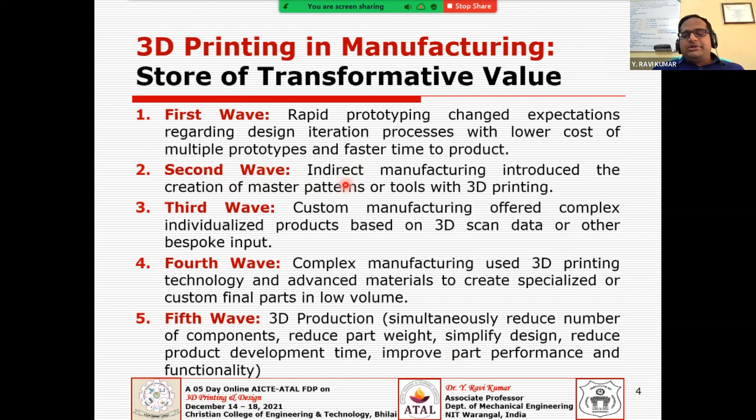So let us quickly see this 3D printing application, and where our tooling application will fit. My intention is to keep a couple of slides here to understand the importance of this tooling application in 3D printing. So we have the design applications.

Probably this is the initial level of application, but we cannot underestimate each and every application. As we understood from the previous slide, the first wave gave us the rapid prototyping application as the coined theme, the second was tooling, the third was customization, fourth was complexity, and fifth was 3D production.

So prototyping applications are also coming in, and it is not suppressed by the latest applications or developments, but you still have a lot of applications in the design space, like design related applications.

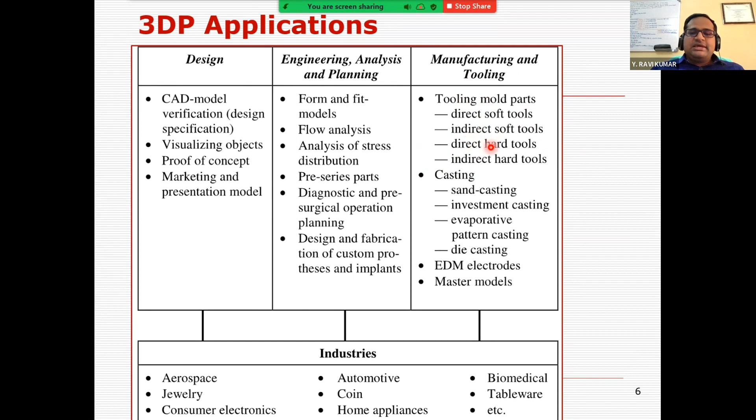Now let's see how these 3D printed parts have been used for which purposes - you can see the market share or percentage of usage of these parts. The majority goes to functional models. Functional model means it is almost a similar material that you are going to use for your final part.

Only then can you correlate your functional models with the original product, how it behaves. It should be the exact material, or it may have close properties or characteristics compared to the model versus your actual product.

So this figure will tell you the story of how this technology got matured in terms of preparing functional models, not prototype models. Though it started with prototyping applications, now the majority share goes to functional models, meaning the technology has matured enough to produce functional models.

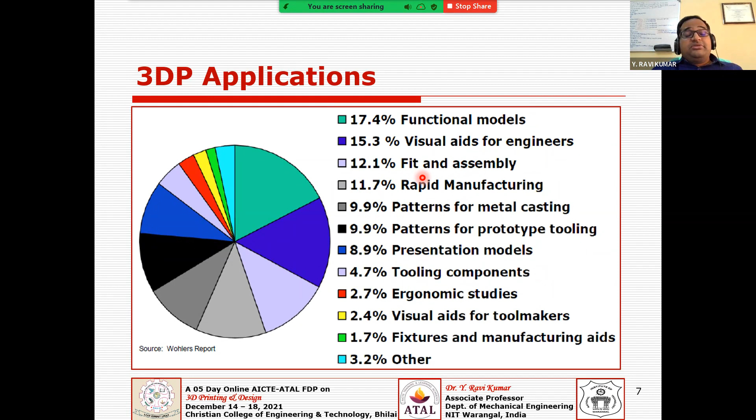So let us see what rapid tooling technology is. Let us see this rapid tooling - what is the necessity of going for rapid tooling? What is rapid tooling?

Rapid prototyping was the technique, as we know, and it was the first wave that we discussed in the previous slides. It has a limited range of materials, starting only with polymers. Majority of the time in the initial days, it was used only for visualization, dimensional checking, and geometric verification applications.

But now we have seen from the statistics that functional models are gaining a lot of attention, so functional testing of these prototypes is often not done before tooling. But due to the different properties of the prototype compared to production parts, the initial rapid prototyping technology was unable to support this functional testing.

This is because of the limited materials, which initially were polymers that could not take up high temperatures and other harsh environments. That's the root cause why people migrated to the rapid tooling methodology.

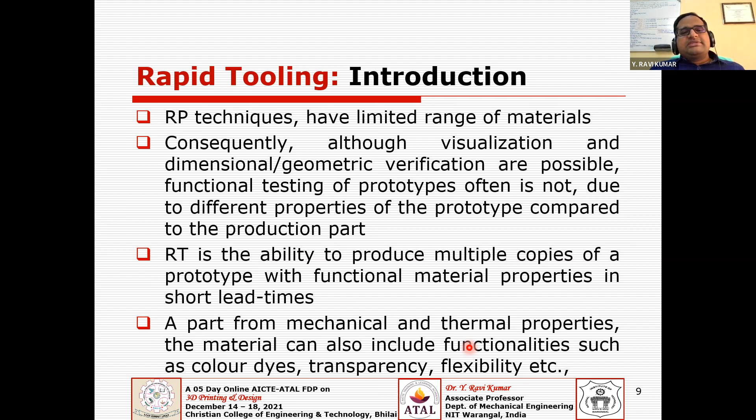Rapid tooling technology means using 3D printing in fabricating the tools. This is the background of where it has come from - the need for more materials, more functional materials, and improvement in mechanical and thermal properties.

This rapid tooling technique is a new technique derived from rapid prototyping, which was the first wave, followed by rapid tooling as the second wave. The need was for faster, better, and less expensive tooling solutions, which has resulted in developing many rapid tooling processes. As on date, around 45 tooling methods are commercialized or proven.

You can either use your rapid prototyping or 3D printed models as a pattern, from which you create molds from this master pattern - you can create molds as quickly as possible. It also uses rapid prototyping or 3D printing directly to fabricate the tools.

That's what we call making a pattern, an indirect way of doing it - it needs to go to the next step to make the mold. Otherwise, you can directly fabricate your tool, but this is for a limited volume of prototypes, not meant for millions or billions, but at least a reasonably good number.

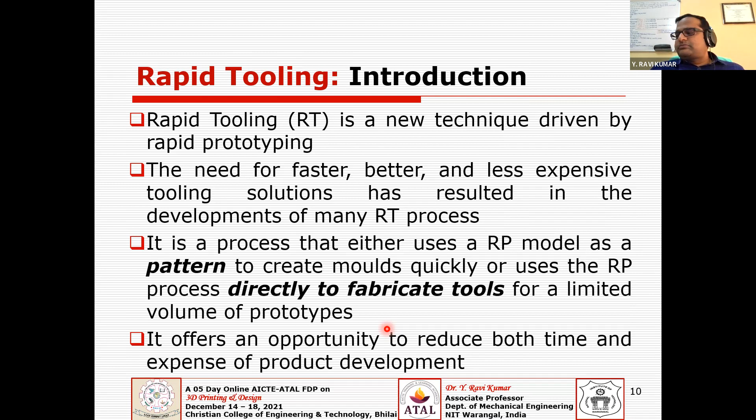Talking about rapid tooling advantages, you have a shorter tooling lead time, as we already discussed, the time scale now goes from months to a few days or a few weeks. So your time frame for development of the tool maybe days or a few weeks, but not months together. And you have low cost because of the short lead times. You also have functional testing of the parts at the early stages of design.

It also allows producing parts for functional testing at the early stages of the design, so you can even perform functional tests because of these tooling applications. And you can directly transfer your parts to the earlier design stage, which otherwise, if you don't have these models or prototypes, there could be misinterpretation through drawings - this can be avoided.

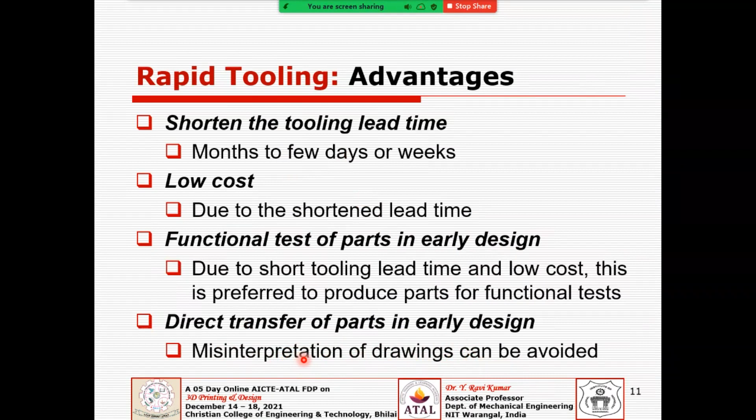Otherwise, if you have a flaw in your design, you come to know that during the production stage, or after service, or after sales. So during service you come to know that there is a flaw in the product or in your design. Then it will cost you a lot to recall those models, the products that people have already used. This often happens, right?

Even big companies, like automobile companies or even the cell phone industry, sometimes during a batch of production there is a problem. They will recall the products and do free servicing or replacement. This may happen quite often, and it may penalize not only the profits but also the reputation of your company. But anyway, these kinds of technologies enable you to avoid committing those mistakes, or give you the right path to run your business.

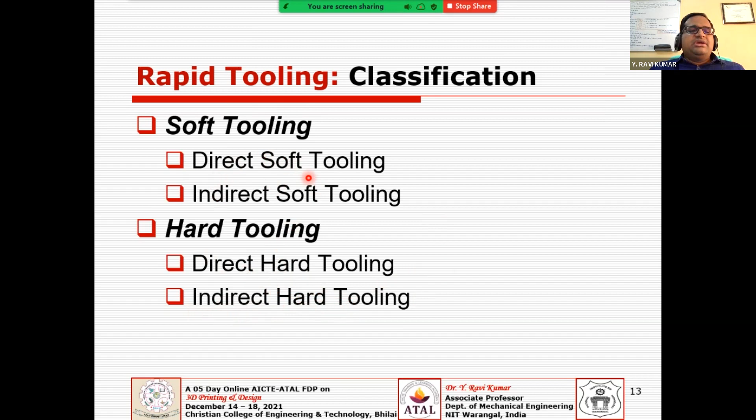Whereas if your tool material is somewhat harder, something like tool steel or any harder material used to make the tool, then the tool life may be high - compared with soft tools, the tool life is high. So for hard tools, either you directly make the tool in a single step, or in a two-step or three-step process, you get your tool - that is the indirect hard tool method. We'll explore each and every class of this rapid tooling.

In continuation with the previous discussion, soft tools are made out of silicon rubber normally, or epoxy resins, or low melting point alloys, or even foundry sand. Foundry sand means that is meant for sand casting applications - you can destroy that mold with a single usage, right?

So it means it will tell you the story - your soft tool may be meant for a minimum of a single cast that you are going to use, or it may be a small batch. If it is made out of foundry sand, it may be destroyed after a single use, meaning it's a single cast. Or it has been made with silicon rubber, epoxy resins, or low melting point alloys, so it may hold for a few dozens, maybe 30, 40, or 50. So you can get out of this tool - that is the soft tooling technique.

Coming to the hard tooling technique, these are made from tool steel, which is harder than the previous material we discussed, and it may hold for longer production runs. So the life of the die, or the number of shots you can make use of this tool, is quite high. That is called a hard tool.

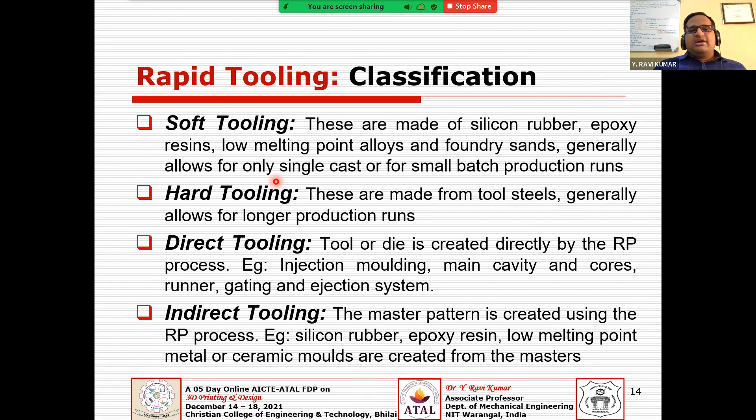So the master pattern has been created using 3D printed parts - you are using that as a master pattern. For example, you may make silicon rubber molds, epoxy resins, low melting point metals, or ceramic molds created from your masters. So you prepare a master, and further you prepare these molds with any one of these materials - you take an ABS plastic, make it as a master pattern, and produce a silicon rubber mold from it. Something like that. So we will discuss and explore all these four categories and various 3D printing processes, and how they have been integrated in these tooling applications.

With this classification, we will start with the first category - the direct soft tooling method. The name suggests direct method, meaning in a single step you are going to get the tool, but in a soft form, meaning it may hold or last for a limited number of uses. You may otherwise call it firm tooling, and you also have bridge tooling, but bridge tooling is a bit different. You may call it direct, soft, or otherwise firm tools.

The direct soft tools - the molding tool is produced directly. That's what we are talking about. An example would be sand castings - you make sand cores with this technology. Then you're going to get only a single cast, since you destroy the sand mold after pouring your molten liquid in, and that's basically a single cast you get.

Or you can go with composite molds, using a process like a vat system such as SLA, or even a powder bed system like SLS. So you can make a composite mold for your injection molding, production of plastic parts. You make use of this composite mold, and that will produce several shots of plastic parts through the injection molding process. In a single word, that's how you make your tool directly here.

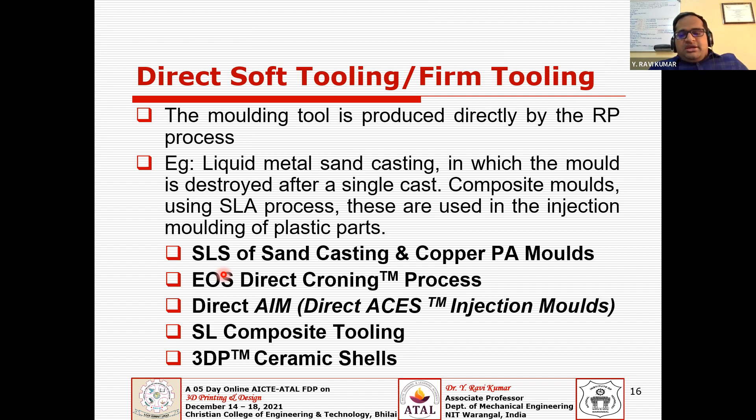Then we'll talk about SLS sand casting molds, or the SandForm. SandForm is a proprietary or trademark name for the material, basically sand zirconia or silicon-based sand particles. This is a powder bed system, where the material is in powder granules, either zirconia or silicon-based sand.

You design the entire die setup in your CAD model, and then it is printed through the sand molds and cores using a 3D printing powder bed system, like selective laser sintering. You ultimately get a single part, since this is only the sand core mold, which gets destroyed once it is cast.

It may take 1 to 3 days to complete the entire process: designing, fabrication, post-processing, the semi-finished casting, and then the finishing. So it will take 1 to 3 days.

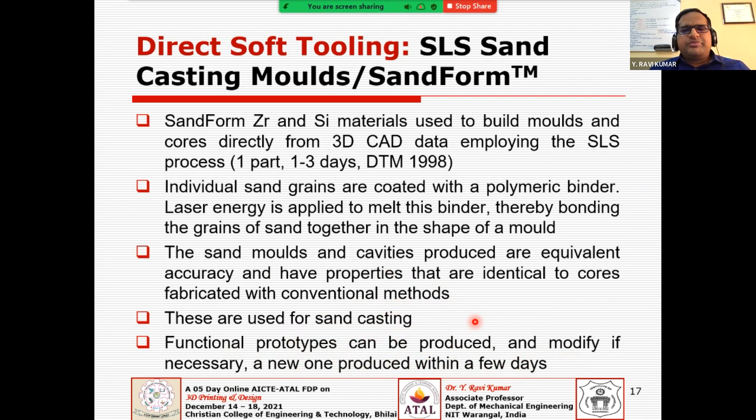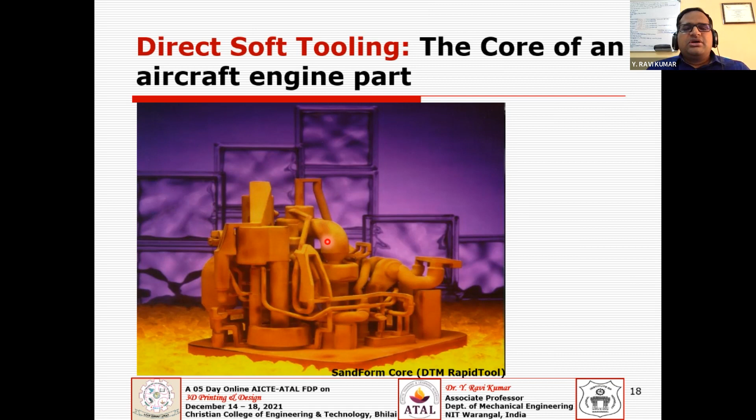Then it will be done in a matter of days, maybe 1, 2, or maximum 3 days. You could be able to complete this—even for something like an aircraft engine part, where you can make sand cores, and further it has been casted into metal, maybe aluminum kind of material.

You can also make use of a composite, like copper plus polyamide. Through this SLS tooling, that is direct soft tooling with composites of copper plus polyamide—a new metal-plastic composite designed for short run production applications, meant for a minimum of 20 and maximum of 150 parts.

So the tool development time will be done within a 1 week span, and no furnace cycle is required here. Your unfinished tool inserts can be produced in a single day. If you include designing and post-processing, everything will take one week, but you can directly produce your unfinished tool within 1 day.

During your CAD stage itself, you include all the cooling lines, your shelling design, ejector pins, guides, gates, and runners—everything in your CAD design itself. So in a single step from CAD to the tool. That's the idea of rapid tooling: CAD to tool in a single step.

So then you have these inserts. The surface is finished with sandpaper, because you definitely need a mirror kind of finish for these tools. You cannot get a mirror finish through 3D printing technology alone, so we need to do certain post-processing, super finishing methods to enhance the surface finish of the molds to a mirror finish.

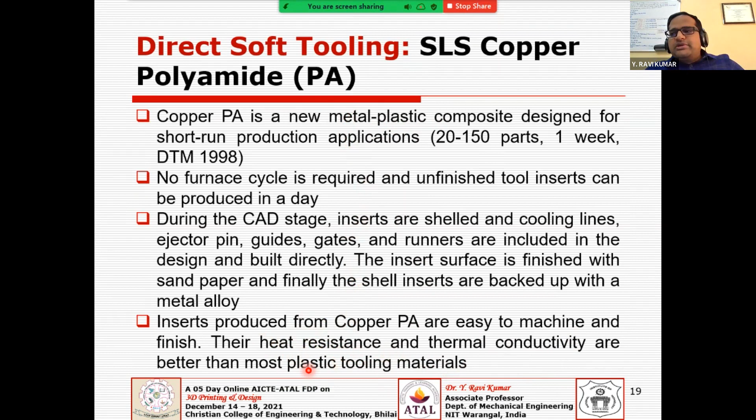So this is a composite of metal plus plastic, giving you the advantage of increased heat resistance and thermal conductivity compared to an ordinary plastic tooling material.

So you have the entire setup in your die design itself. In the CAD model itself, you include your cooling line, ejection pin guides, and this is the back surface of your insert. You can see the working surface, which has runner gates and everything included.

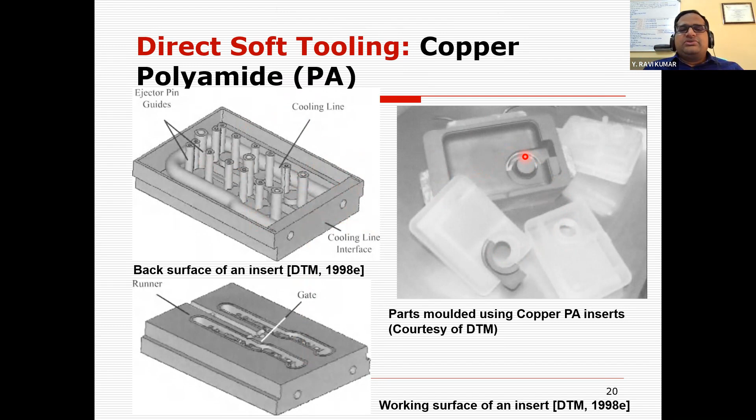So you can see these parts have been produced by making use of this insert. In this way, you can directly produce your entire die setup from CAD to the tool in a single step, and then integrate it with your injection molding, die casting, or whatever conventional method you use.

Then you have another technique here called direct croning. It's almost similar to the previous technology, but this is a German technology. There was actually a dispute between these two companies, but anyway now they've had a settlement or compromise. There's a slight difference in the process, but it almost looks the same.

You have sand particles, the powder, sand granulars taken the same as the previous one, and you have sand casting molds where the cores are directly sintered. Again, this is resin coated foundry sand, just with a different proprietary name, but it works on the same principle. Nothing is much different here—your molds and cores have been produced as a single part, because it is a sand core mold.

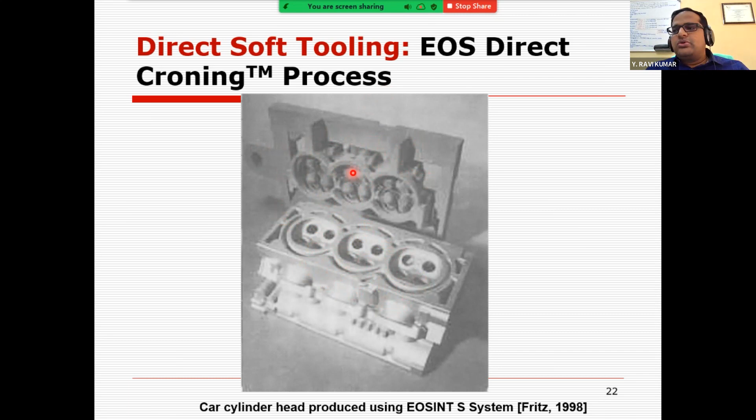So they have produced a 3-cylinder engine for the car, and this is what they have done through direct croning, or this sand core has been produced, and further it has been casted.

And you have this sand foundry sand. It has been used to build the material either in SLS and EOS. So both SLS, as I said, is a US based technology, and this is a German based technology, but it works with the same principle. There won't be much difference, as I already said.

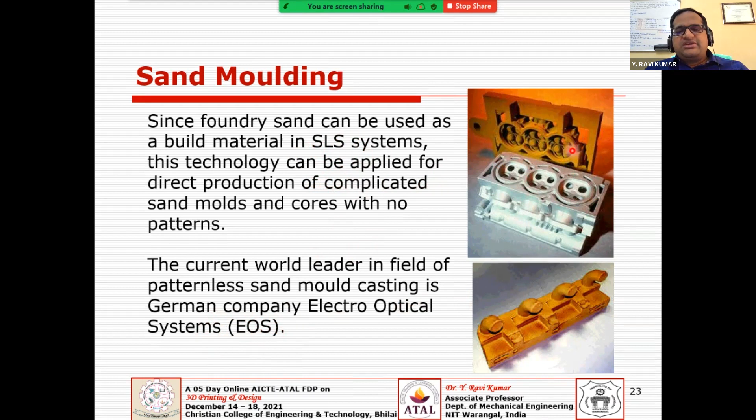So this is the sand cores, and then metal parts has been produced, and you can find other practical applications, maybe in the impeller, where you produce this sand core through a laser based system, just now we discussed, and then further it has been casted.

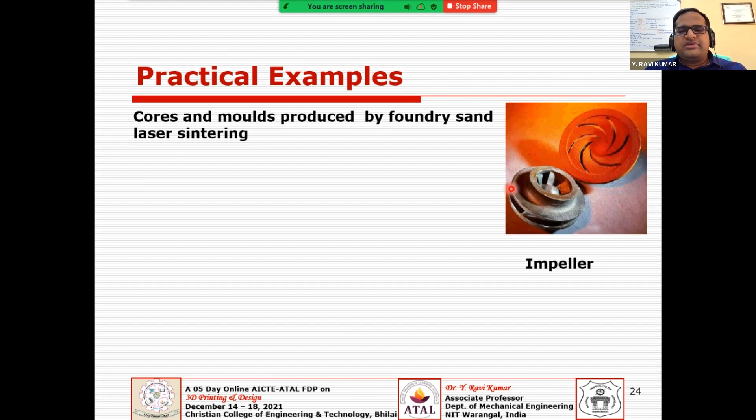And this is the hydraulic controller, the central block. The core, sand core, has been produced, and further it has been used for the casting.

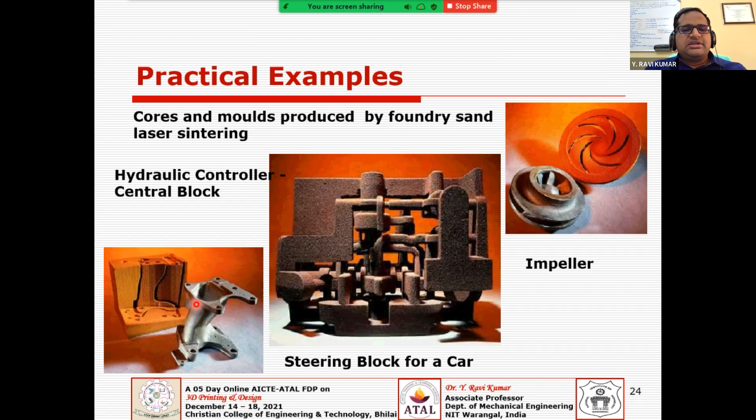Of the metal parts. And you have the steering block for a car. This is the core, the sand core, and this is the casting that has come out from this sand core, and the metal casting that has come out from this, one of the automobile applications. Either it may be an automobile application or any machinery applications like impellers or hydraulic controllers.

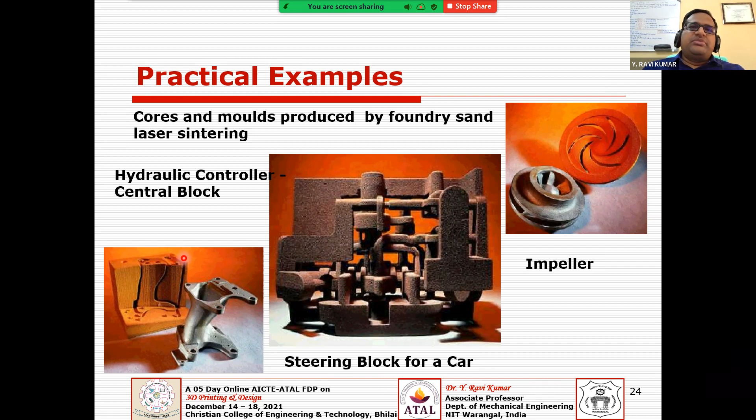So we can quickly produce this, right? It's a matter of days. Otherwise, traditionally, conventionally, it used to take months together to develop this sort of tools.

And this is again a sand core, and further it has been casted in aluminum, say A356-T6. So it's aluminum. It has come out from this sand core to the casting.

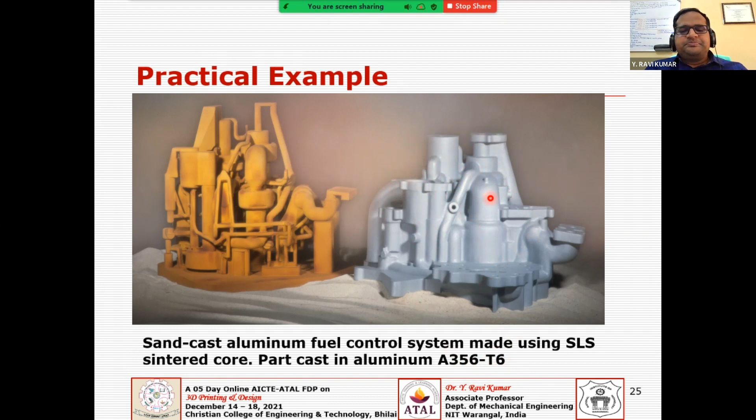And you have another technology called voxeljet. Voxeljet comes under a binder jetting system. I hope you are already aware of binder jetting technology in 3D printing. So far we are discussing a laser-based powder bed system, that is either your SLS or EOS, which basically comes under a powder bed system. But you have a binder jetting system, where you are going to jet the binder onto the powder particles.

So this voxeljet technology produces the sand cores and the mold packages. The technology used is different here, but the workflow remains the same. You start with a CAD model, that CAD setup, which consists of the entire die, a complete die setup or design, and then further it has been printed as a sand core, and it remains the same.

But you have very big size components here, like it may be 4 meter by 2 meter by 1 meter. So that is huge, a big sized component that can be produced here. So you have big dies, tools which you can directly produce. The materials typically used here are quartz sand or furan resin, with molds and casting properties which is compared with customized solutions.

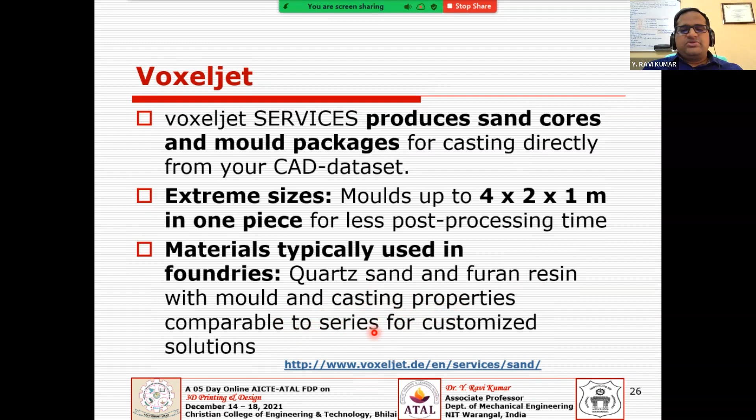And you have another company, ExOne. Voxeljet and ExOne, these are commercial companies, where MIT University has sold the patents to different companies in different regions, in US, in Europe. So another one is ExOne, which also works with the same binder jetting technology.

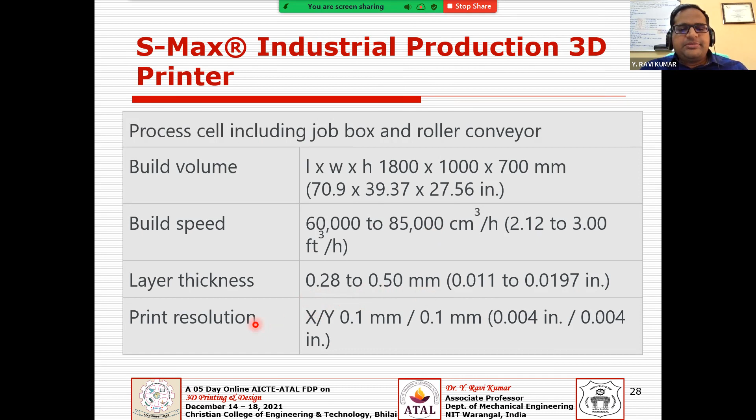So for your industrial materials, you have build volumes here also, say around 1800 by 1000 by 700, and build speeds around 60,000 to 85,000 centimeter cube per hour. So it's a huge speed. It's multi-jet jetting with the binders, and it is a bit faster. Even it can be further improved, because the speed should be improved further. But this is the typical speed you're going to get in the present scenario. The layer thickness may be around 0.28 to 0.5 mm, and the print resolution is 0.1 mm by 0.1 mm.

The process basically works with the binder jetting principle. And you have other technology called direct AIM.

Direct AIM has been developed from Dacell and Barritt, and this is meant for producing 20 to 100 parts, a minimum of 20 and maximum of 100. Primarily it has used the VAT-based SLA system, the stereolithography system. As we know, VAT-based systems produce a resin-based material, a photosensitive polymer resin, which allows directly producing injection molding parts, so thermoplastic injection molding.

These injection molding parts have a different build style, not like the models used in routine applications. They have dedicated toolpaths and support structures for injection molding applications. This technology was developed exclusively for injection molding, for preparing injection molds, and it produces a high level of accuracy. One of the biggest advantages of VAT-based systems is you get the best surface finish in polymers among all 3D printing technologies.

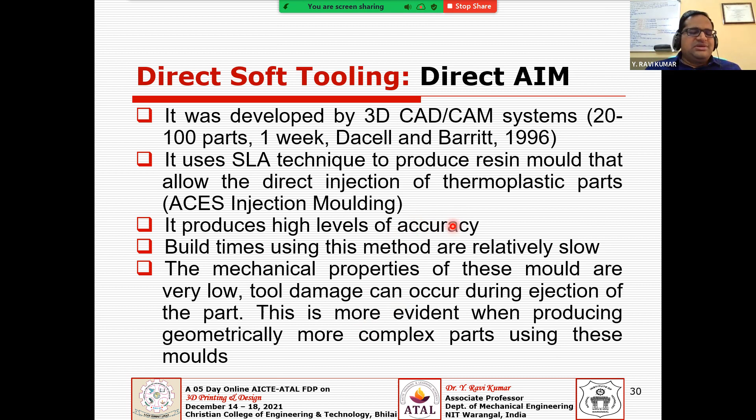And you have the direct AIM process. Again, it should start with the 3D mold design, and further it is done through your machine, the SLA-based machine. This is where you design everything - you have the cavity and core, everything designed in the CAD model, and it gets printed here.

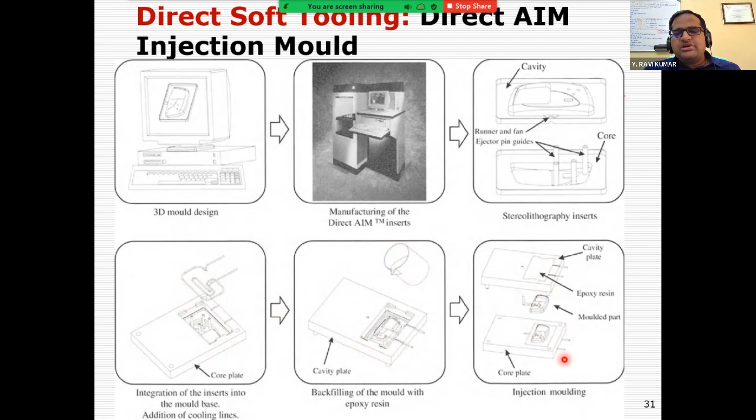As we already discussed, you are going to backfill - this is the backside of your mold where you add cooling lines, and you backfill the mold with epoxy resin. This is not the working surface of the mold, it's the backside. Finally you have the cavity and the core, and the part that comes out from this injection molding process.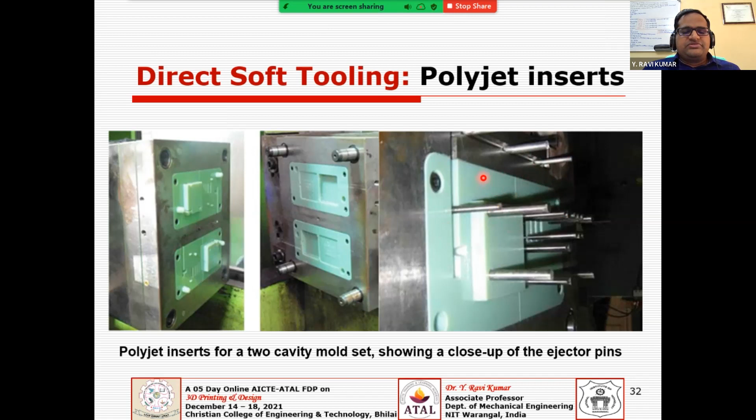You can also see other applications of injection molding, like mold setups which can be directly produced - for example, two-cavity mold sets produced through material jetting, the PolyJet technology. These base plates are printed through the PolyJet polymer technology, and then fixed into the ejector pins and the entire setup, so we can make use of this.

So far we have discussed direct soft tooling, but coming to indirect soft tooling means you're not getting the mold in a single step - you may get it in 2 or 3 steps, which we'll see. Indirect soft tooling is the method to produce a master pattern initially, and it is used to replicate your mold. You can use materials like rubber, epoxy, or low melting point metals - we will see one by one.

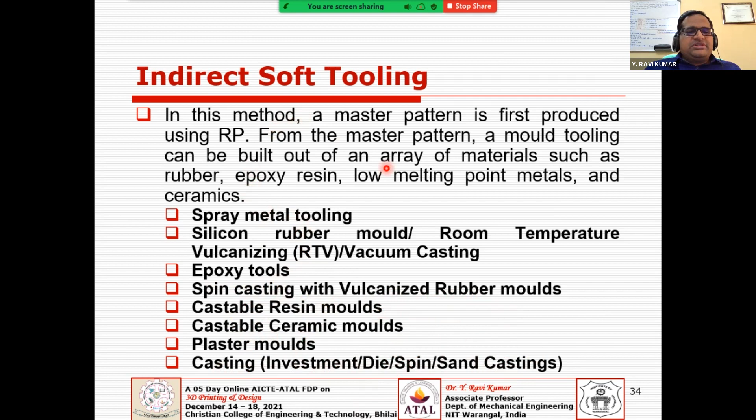There are several technologies, but I'll cover only the well-known indirect soft tooling methods. You have spray metal tooling and silicon rubber molds - this is very famous for automobile applications, used by several automobile companies integrated into their processes. You also have epoxy tools, spin casting with vulcanized rubber molds, castable resins, plaster molds, and of course investment casting, die casting, spin casting, and sand casting. We'll see these technologies one by one under indirect soft tooling.

As the name suggests, you are going to make the master pattern out of your 3D printing technology - that's why it's called an indirect method. Initially you produce this master pattern, and then in order to improve the working surface area, for the heat resistance and other characteristics you are looking for, you use a metal spray gun.

You have a metal spray shell that has been coated onto the top of the master pattern, and now you fill it with 85% aluminum filler. So you fill it, and this is half of the mold. You turn it on the other side and do it for the other part of the die.

So again you put the split pattern, the other half, and then you spray it with metal spray. Then you pour this resin, and finally you are left with your mold and that cavity. Then you can make use of this for your application.

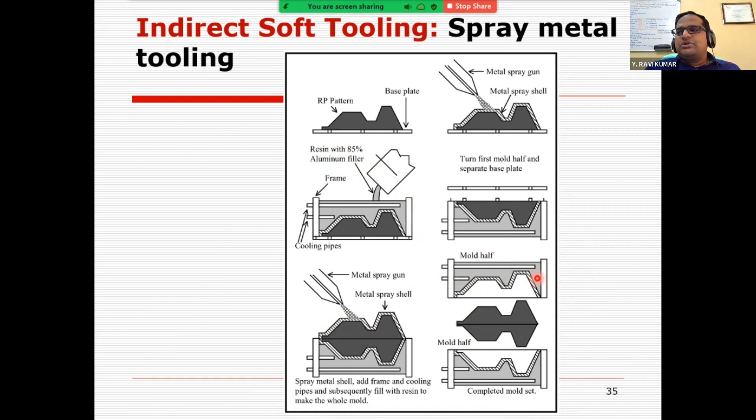So you produce the master pattern through 3D printing technology. You make this master pattern, and then you use a vacuum chamber here. Probably you may come across this vacuum casting technique. So you have the vacuum chamber inside, and you have the silicon slurry.

So you have the sprues and the mold box, and you pour it and allow it to solidify, this silicon rubber, the silicon slurry. Then you cut this rubber mold into two halves and remove the pattern, and now you have that mold, and now you mix your material.

Like you have resin A and resin B, and we can add some dyes also to get different colors. So now you stir it, and then you pour it into the mold and allow it for solidification, and now you cut the parting line, and now you have the final part come out.

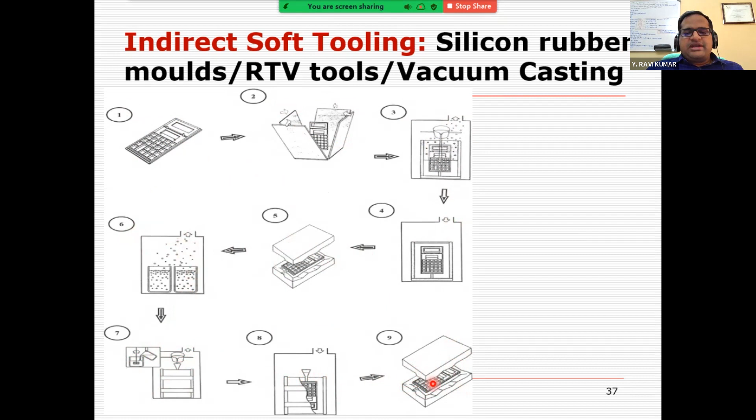And this may be the same, but shown in a different version. But anyway, you have the master pattern, put it in a box, and then you pour it. You make a rubber mold and cut it, and add it, and put it again. Finally, after solidification, you cut the parting line, and then you get your part.

So, with castings, you can go with metal molds. You have investment casting, die casting, spin casting, sand casting. These metal molds are very time consuming and more expensive to generate. So if you go to machining, conventional machining...

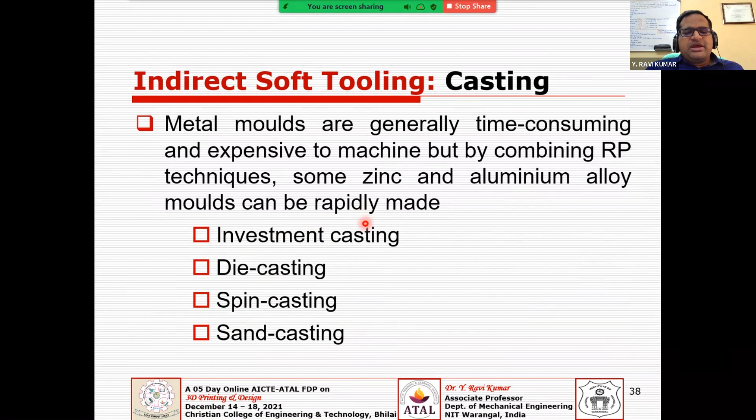But if you combine this with 3D printing, even some zinc aluminum alloy molds can be rapidly made through this technology. And this investment casting, as we know, we need to have a sacrificial model.

So nowadays the sacrificial materials, each and every 3D printing machine can accommodate either in terms of wax, foam, paper, or polycarbonate. This will act as a sacrificial pattern, so that you can directly produce any complex geometries through 3D printing or rapid prototyping, whatever you call it.

And you can use that for your investment casting applications. You use this as a sacrificial model and prepare the molds, and then you cast it.

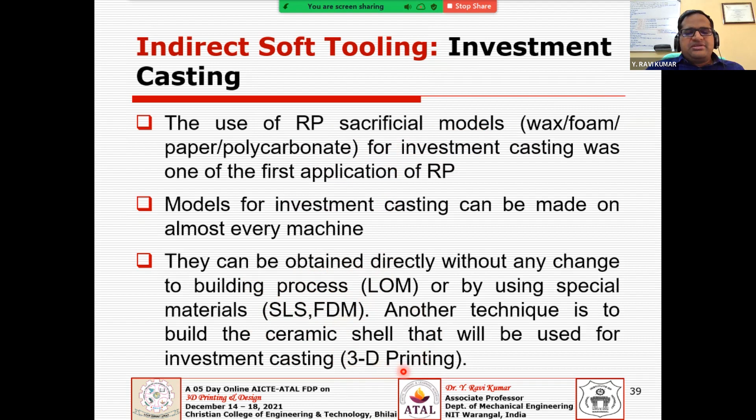So for investment casting, every machine will support this, maybe you can go with a sheet-based technology, powder-based technology, extrusion-based technology, or binder jetting technology. Almost all the processes will support it, so you can find any one of the sacrificial nature of the material that will support all these 3D printing processes.

As we know, in the investment casting process, only one thing has changed: you have made the wax patterns or sacrificial patterns through 3D printing, and the rest remains the same. You prepare a tree, apply the slurry, heat it, evacuate it, and then cast the molten metal into the cavity, allow it to solidify, break it, take out your part, and do finishing to get your metal part.

I'd say you can see this is one of the automobile applications - this is the cylinder head. So this is the pattern, the sacrificial pattern, which has been produced through additive manufacturing, and then further it has been cast. So this is the casting, which you can directly use for automobile applications, and it may be an aerospace application or automobile application to get things like a wiper motor casing.

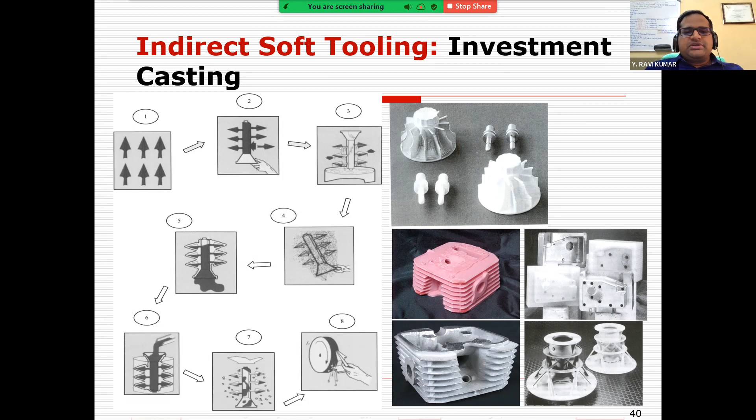You can even use some impellers, or metal screws, or implants for medical applications. So you can make these sacrificial kinds of patterns, and then cast them in the investment process. So you can generate objects through 3D printing, which is used indirectly in an investment casting process, where you can make a master pattern for creating the silicon rubber molds.

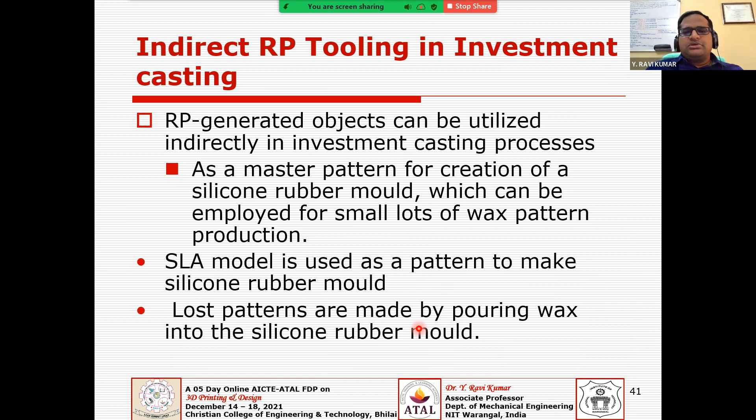This can even be employed for a small lot of wax patterns that can be produced with that. And you have SLA models, which can also be used to make the silicone rubber molds as a master pattern, or even lost patterns can be made to pour the wax into silicone rubber molds. Or you can even go with die casting applications.

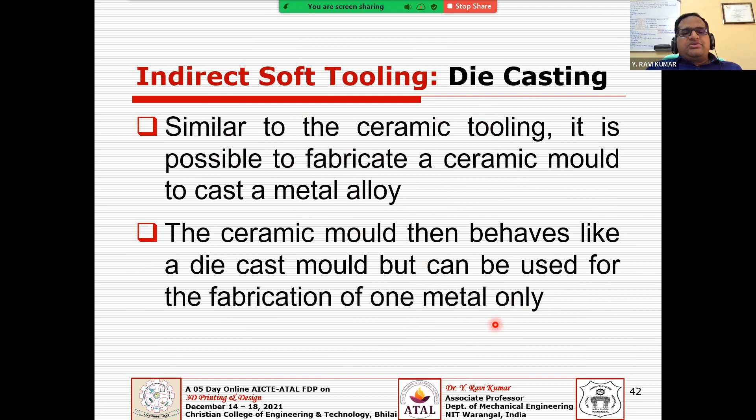In a similar way, ceramic tools can be made, and it is possible to fabricate ceramic molds to cast a metal alloy - that is your die casting application. So this can also be done through this process. Your ceramic molds behave like die cast molds, and will be used to fabricate only one metal - that's the thing.

Then you have the next class of tooling method, which is direct hard tooling. As the name suggests, you're going to get it directly, and it's going to be a hard tool, meaning the tool life may be high. Coming to direct hard tooling, in the previous indirect tooling methods, you needed to have...

...a minimum of one intermediate replication process, meaning from master pattern to mold - that is the minimum. It requires one intermediate step to complete your tool. But here you can directly get your tool in a single step.

But anyway, if you are going with multiple steps, definitely your error may accumulate. If there is an error in any one of these steps, going from the master pattern to replication of your mold to the casting, there will be a chance of losing your accuracy. But you have an opportunity here with the direct tooling method.

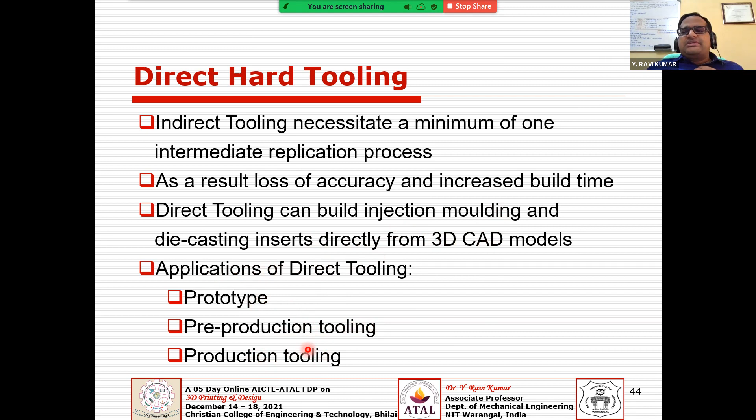So you can directly produce injection molding or die casting inserts - that is from CAD to the die insert for your application, like injection molding, die casting, or anything for that matter. So then you can use these for applications like prototyping, pre-production tooling, or even production tooling parts can be made through this.

Coming to direct hard tooling, this is a very interesting and recent development, and a lot of research is going on in these hard tooling methods. The biggest advantage of hard tooling is faster turnover times, and it creates highly complex shapes, molds, for high volume production - meaning you can use your tool for a good number of shots, giving you higher volume production than the previous technique.

So you have these inserts for pre-production or production tools, like EOS DirectTool or direct metal, DTM - again you have two German and US companies here working with almost similar technology - and sheet-based LOM tooling, and Pro Metal, which is again a binder jetting system, and laser engineered net shaping, which is a DED system. So altogether, to produce the hard direct tool, you need a high melting point metal, maybe hard tool steel or substitute materials somewhat close to that, and then you may use this direct hard tooling process.

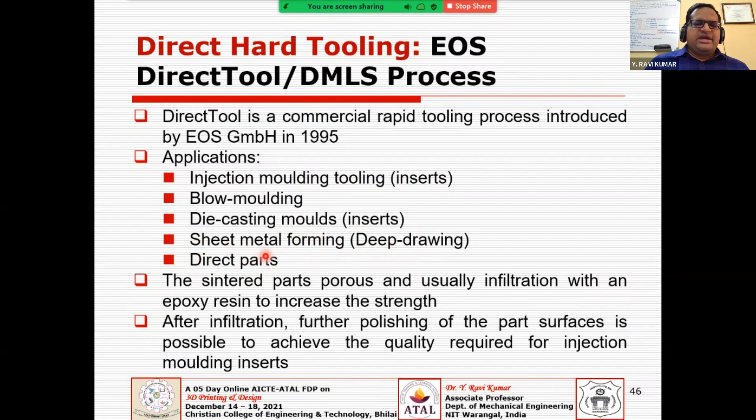Deep drawing dies can also be made directly, or even direct parts can also be done. They do have a certain material - the powder material may be direct steel 50, or direct metal 50, or direct metal 100. This means there is a slight composition difference, and the size of the powder particles designates 50 micron or 100 micron, with composition also slightly varied.

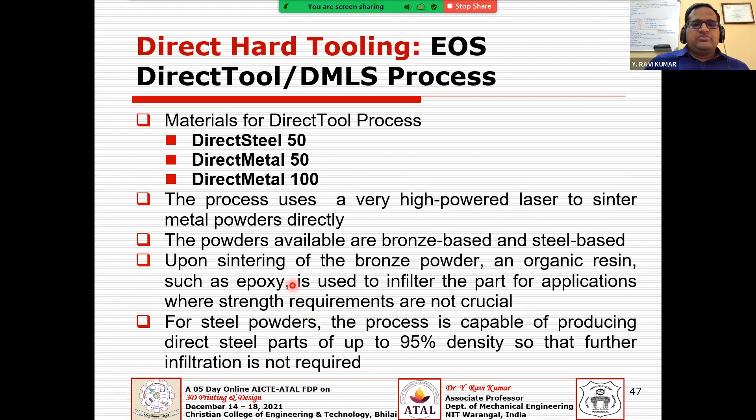So you have bronze based or steel based powders. With bronze based powders, which have been sintered, the binder has been coated with organic resin. Typically this produces a 90% dense part, and further it has been infiltrated to get 100% dense parts. So infiltration should be done here - this is one limitation, you have to go with infiltration. It is not required, sorry - infiltration is not required if you go with a steel powder, but whether you are going with steel or bronze, that matters.

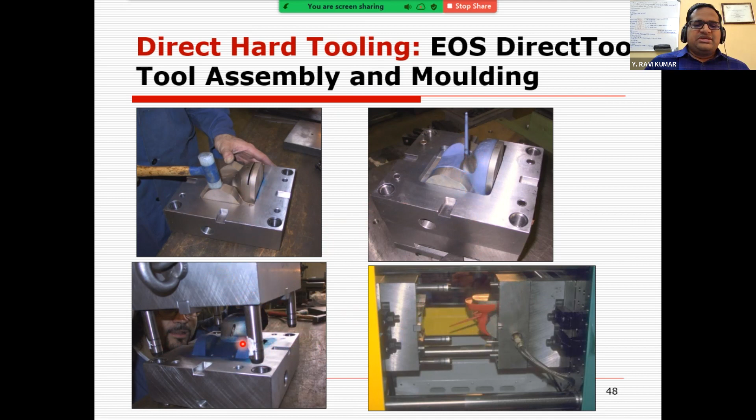So then you can directly produce this die tooling assembly, this entire thing. This is the base, and then these are the inserts that have been produced through this 3D printing technology. Now it has been assembled and integrated with the injection molding machine, where you get these plastic parts from this die. This entire tool assembly, with the base plate and the ejection pins, everything, has been done through additive manufacturing.

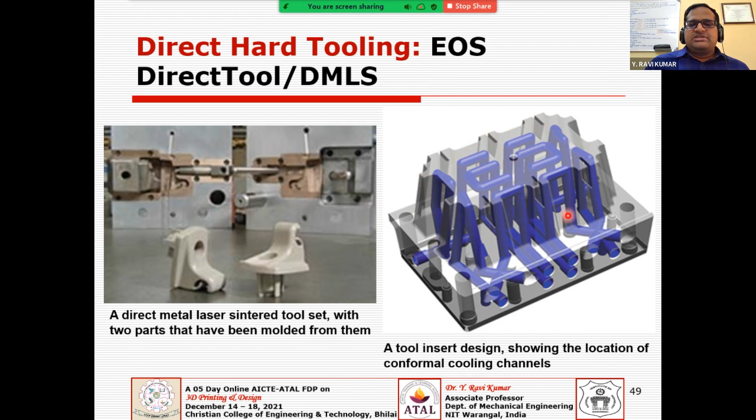This is from EOS DirectTool, and this is another die setup that has been produced, and from that die, these are the plastic parts that have come out, and even the conformal cooling channels. This is another advantage, an added advantage with the 3D printing technology, where you can confine your cooling channels to the shape of the object that you're producing.

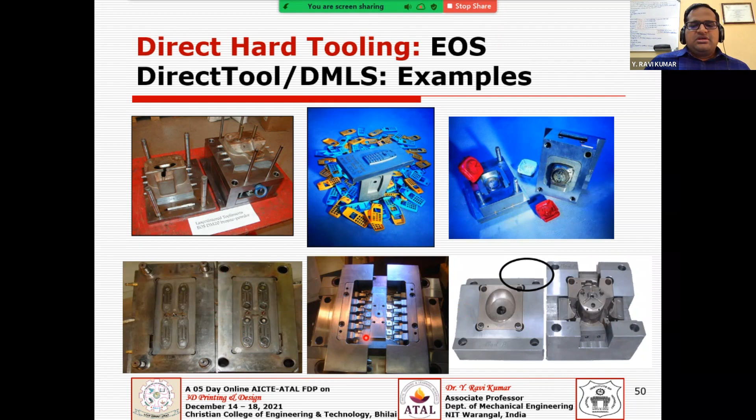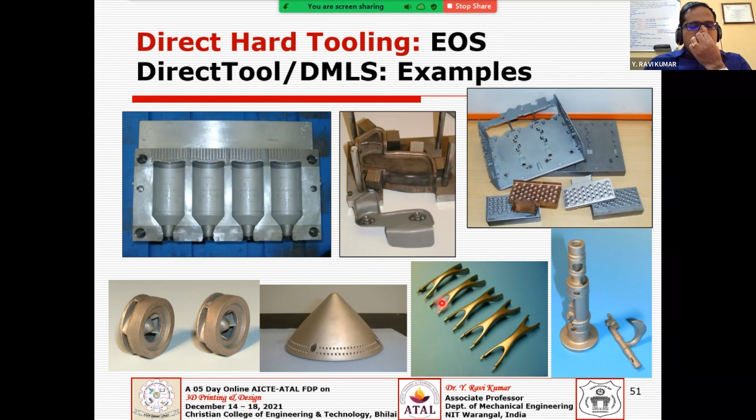And you have blow molding dies that can also be done through this, and some of the stamping dies. And you have direct parts, an impeller or some instruments - these are directly produced.

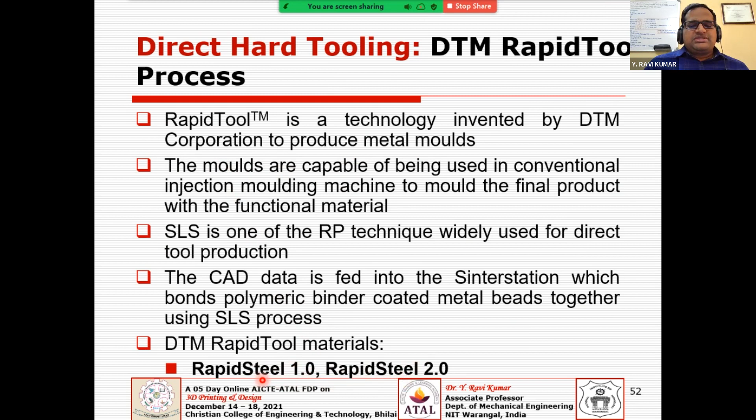And the rapid tool process - you have two different processes here: rapid steel 1 and rapid steel 2. There is a slight difference between 1 and 2, but basically you are going to get a green part initially, and here the mean size of the powder particle is 55 microns, and the green part has been initially produced.

Then you use a thermoset binder coating, which is put in a furnace for cross linking. Then finally you do furnace processing to fully densify your part to 100% dense by mixing it with copper, infiltrating it. So ultimately your tool is 60% steel and 40% copper, and it's fully dense. It has been finished with surface grinding and milling and drilling, EDM, polishing and surface plating. You come with a mirror finish by performing this post processing.

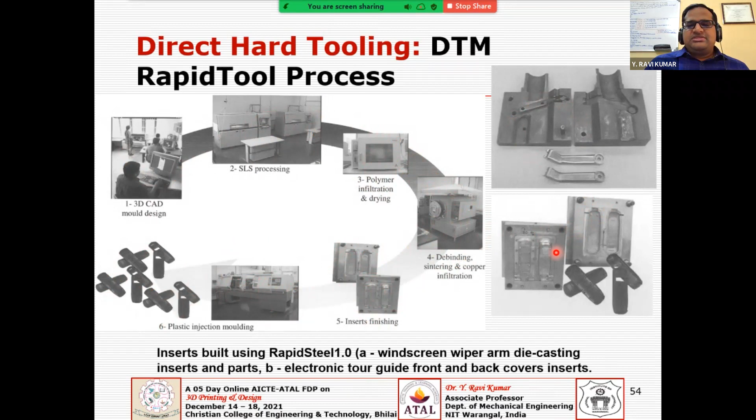So you have other dies and parts produced with rapid steel 1 and 2. There is a slight difference - you have different temperatures and different infiltrants you use here, but it has the green part, brown part, followed by infiltration for 2 hours at room temperature, and the temperature raised to 1050 degrees C. This is the furnace treatment that should be done.

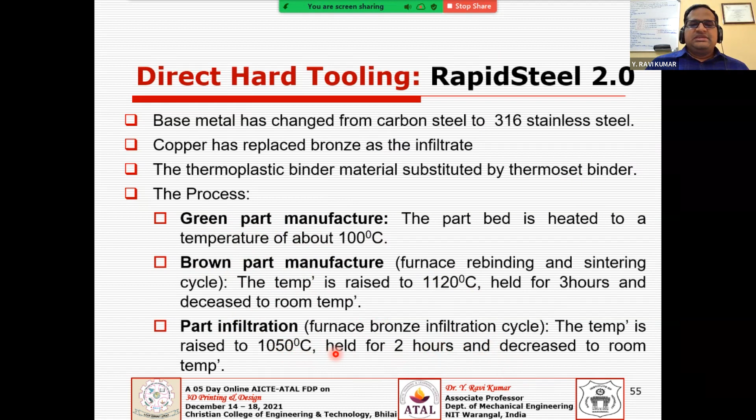And you have the LOM process - it is a sheet lamination based technology, where you have the binder coating, and the polymer sheets have been coated.

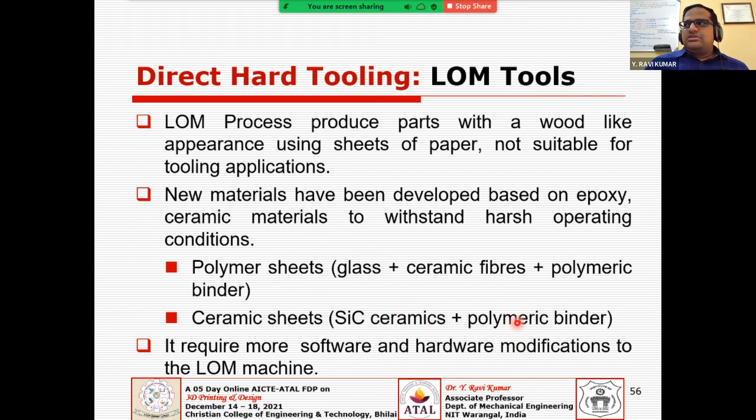You have the glass plus ceramic fibers plus polymeric binder coated onto these sheets, or either you use polymer sheets or ceramic sheets. You have silicon carbide ceramics plus the polymeric binder used as a material to prepare these tools.

And ProMetal is an Irwin technology that again has come from MIT. This is a binder jetting based technology, and it gives better properties to the tools, which can withstand up to 200 MPa, and can hold for about 1 lakh shots with glass filled nylon.

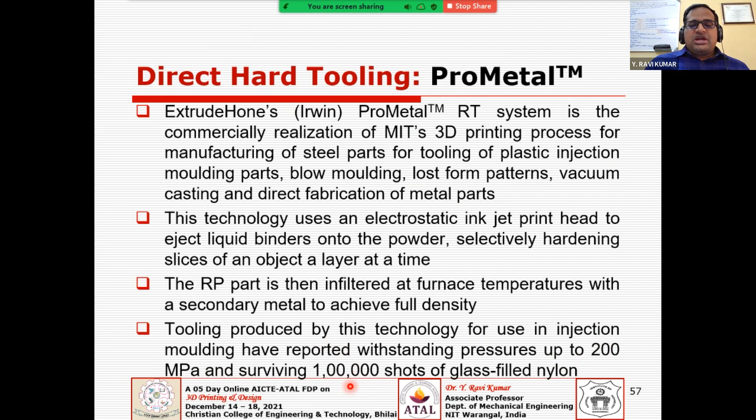So the last classification, the last method here, is indirect hard tooling. As the name suggests, it's indirect, and hot means you have at least one intermediate step, and then you get the hard tool. You have numerous indirect RP tooling methods here, with continuous growth in this category.

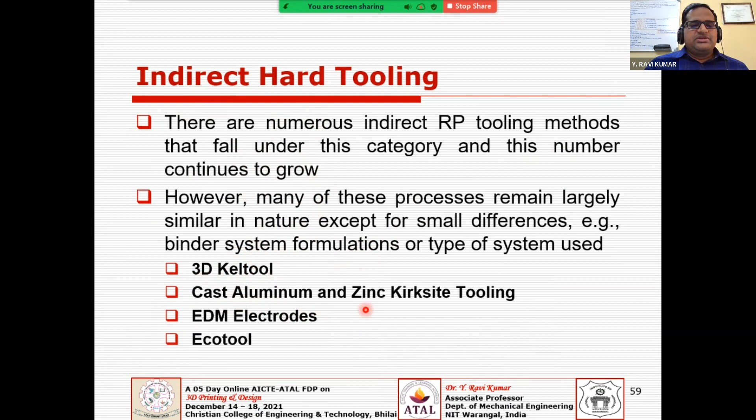These processes remain, say, with small differences. Like, 3D Keltool is one of the well known methods under this indirect hard tooling, and cast aluminum, zinc tooling, and EDM electrodes, Ecotool.

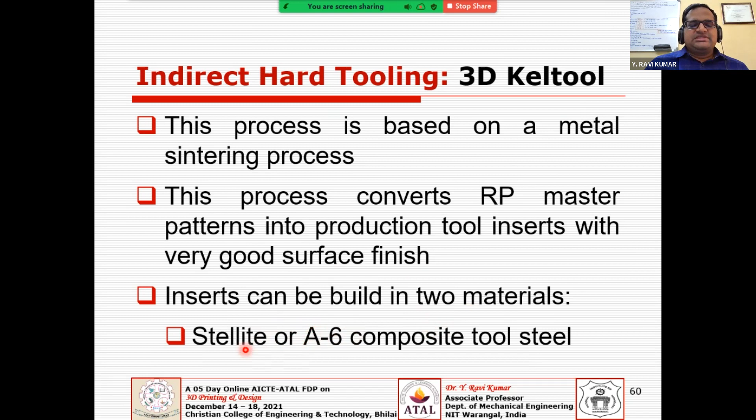3D Keltool is based on the metal sintering process, and it converts your master pattern into a production tool insert with very good surface finish. This insert is built into two materials: Stellite or A6 composite tool steel.

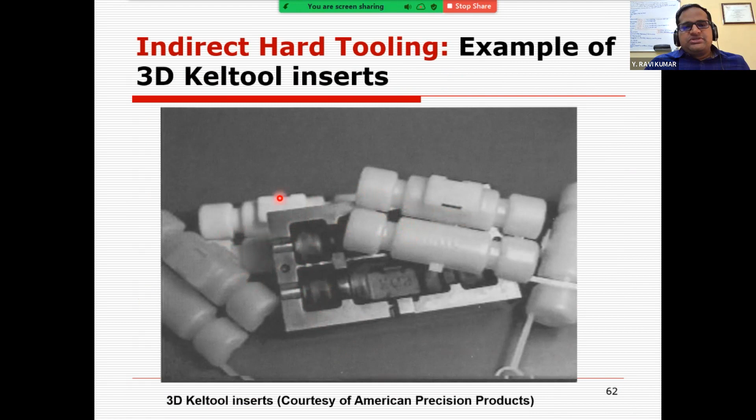So these are the 6 steps it will follow, and you can see this is the die, and these are the parts that have been produced through this 3D Keltool process.

Another one is cast aluminum and zinc tooling, where cast Kirksite cavities are produced through a VAT based SLA system, and it will take 2 to 3 weeks to develop this. You get very accurate patterns, and aluminum or zinc based alloy will be used here. This type supports higher production volumes.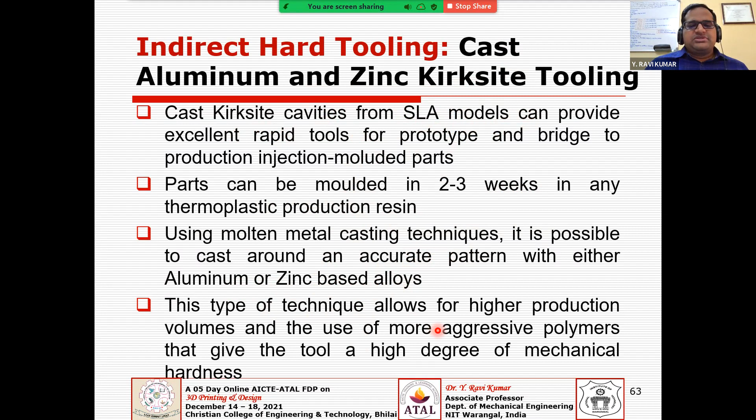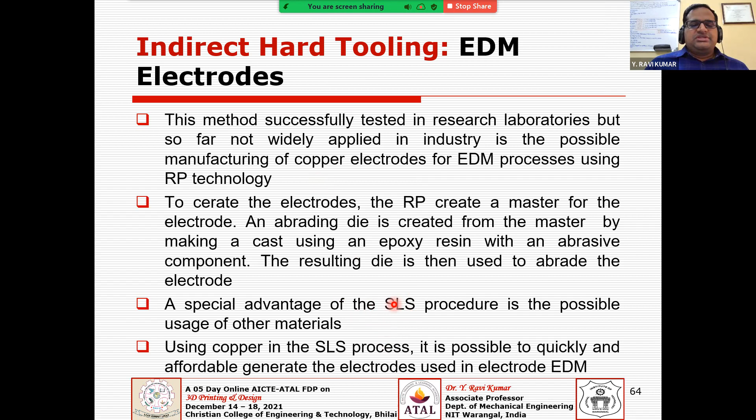It's more aggressive in polymers that have high mechanical properties and hardness. EDM electrodes can also be done through here. The process used here is a powder bed based SLS system.

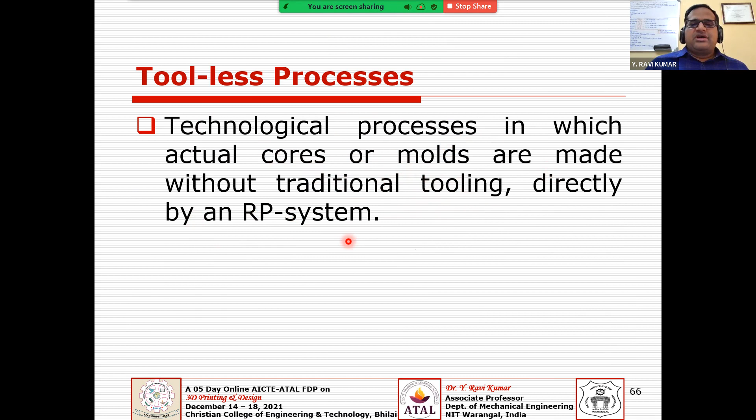And the last part - anyway, this is the 4 categories - but you also have another process called the toolless process. What do you mean by toolless process is, you have this technology in which the actual cores and molds are made without any traditional tooling, directly by your 3D printing or RP system, meaning your 3D printing or additive manufacturing.

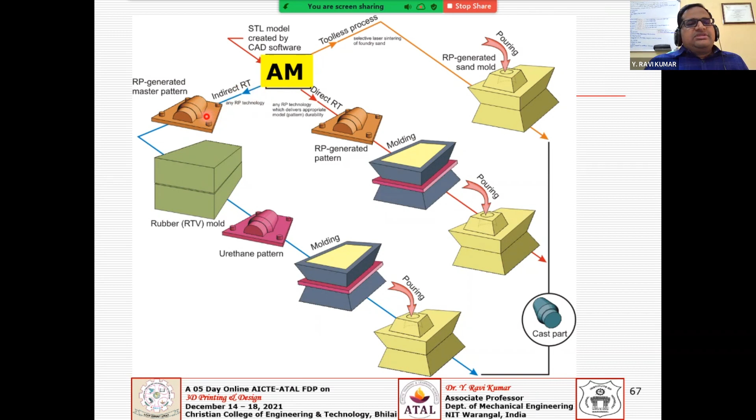So you have the indirect method, just now we discussed: you have a master pattern, then the mold and the urethane pattern, then molding, then pouring, and finally you get your casted part. So this is indirect, but direct means you have a direct tool, molding it, and pouring it.

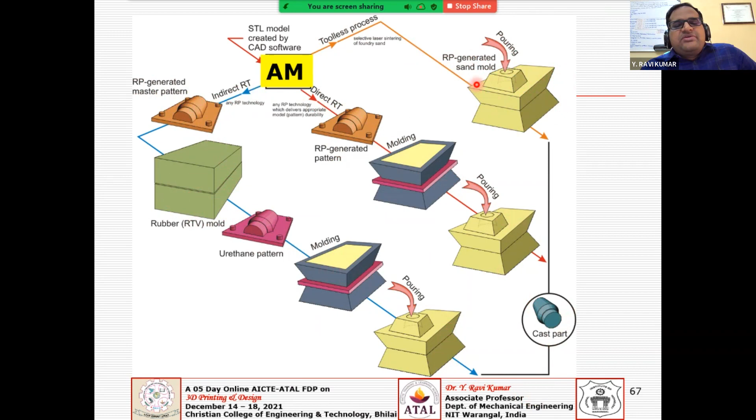But you have a toolless process where it doesn't require any tool, and it will automatically generate your sand mold. You use that sand mold to pour your casting. So this is called a toolless process.

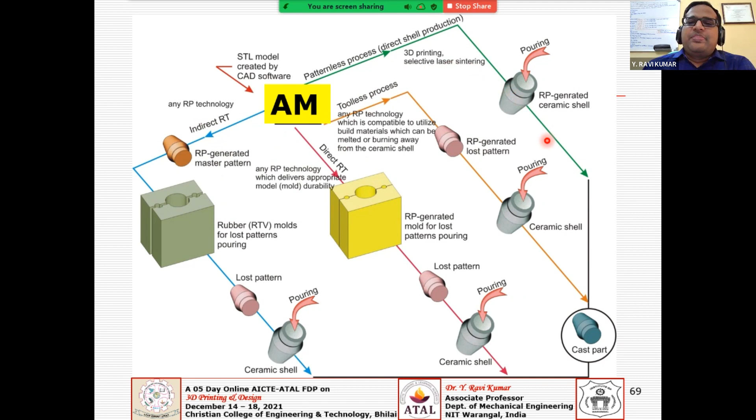And even a patternless process can also be used, like the toolless process just discussed - you have indirect, direct, and toolless. Or you can directly make your ceramic shell instead of making it and then pouring it. Directly you can make a ceramic shell, so it's called a direct shell process, which is a patternless process. So you have toolless and patternless, where otherwise you come with a direct or indirect method, or it will be toolless or patternless, where you can directly produce the shells to pour your casting. So let me summarize what I have done.

Presently you have 3D printing or RP systems that are very different, not only in cost but in materials. These equipments can handle a very wide range of materials that you can process through this rapid tooling technique, which will bridge that gap. You have a wide range of capabilities, like powder bed SLS systems with wide material capabilities. Cost effective systems like extrusion-based systems are much less costly, and even 3D printing technologies are less costly than other processes, but cost effective solutions also exist to integrate tooling applications.

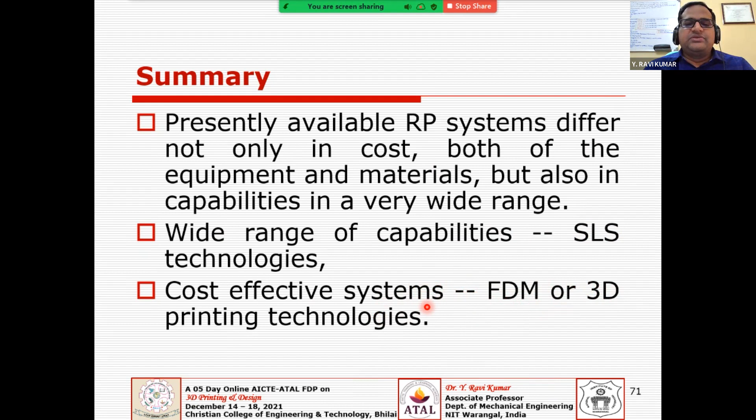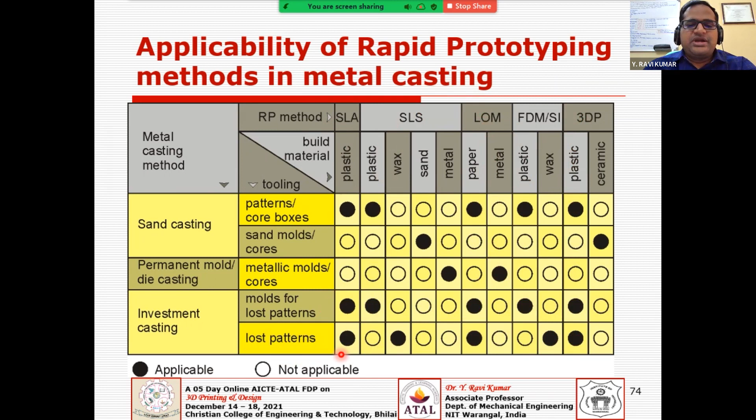Coming to permanent mold and die casting, metallic molds and cores can be prepared, meaning it needs metal facility - so you have the powder bed metal system, or through LOM you have metal, or powder bed can also be added here. You can even use the powder bed system to make metal permanent molds or die castings. Coming to investment casting, you have molds for the lost patterns. You have a good number of choices with these 3D printing technologies, like SLA which is a VAT system, or powder bed, or LOM sheet-based or extrusion based, or even binder jetting - so many options. But for the lost patterns, you have about five choices for preparing them, which is still a good number of choices.

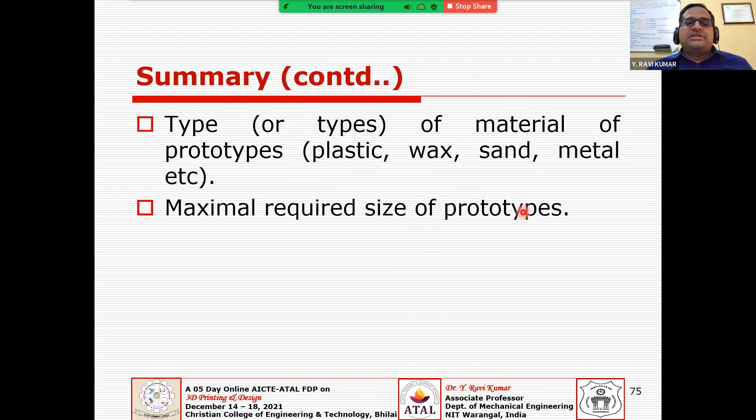And the types of materials for your prototypes, like plastic, wax, sand, metals, etc. Depending on the available equipment or facility you have, and the material supported from that facility, or if not, whether it can be done through a direct step or an indirect step - that needs to be determined. Then there's the maximal requirement size of the prototype. Your build size is also another constraint we need to look for - what is the size of your tool. Based on that we need to choose or select an appropriate process.

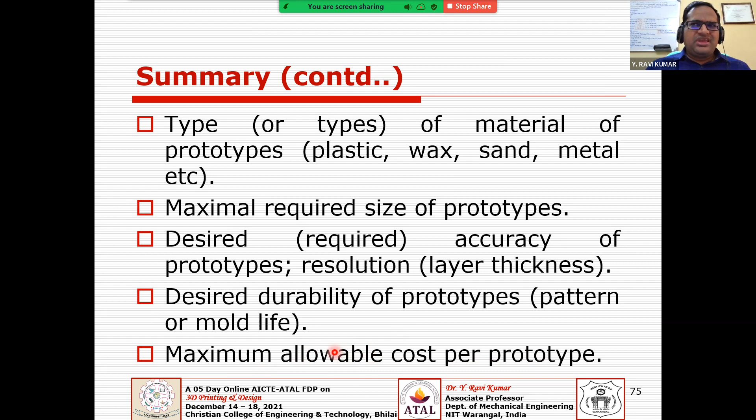Other things should be considered too, like the accuracy of the prototype, the resolution, layer thickness, and other considerations we need to take. Also durability of the prototype or pattern - what is the life of the tool you're anticipating, that should also be considered. These are some things to consider, and even maximum allowable cost or budget will also be considered to select the type of RT method you are going to adopt.

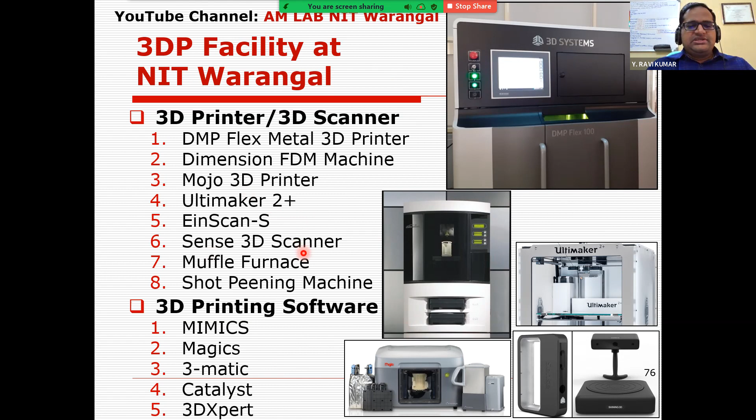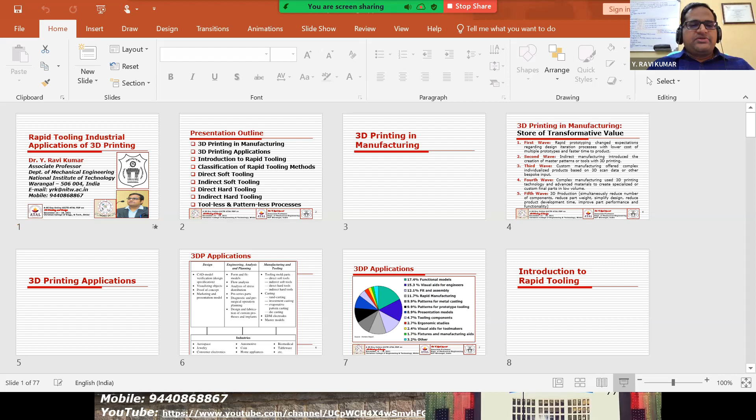Okay, I have covered this from my side. These are some of the facilities we have, which I have already explained in the previous session. So I have done from my side. If you are having any queries, participants, please ask.